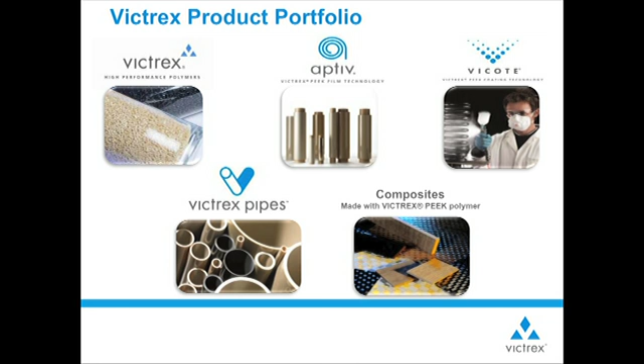For example, VICTREX maintains and builds on the most extensive database of technical and application testing for PEEK. To aid in application development, we offer product samples, part prototyping, and mold trial support. Our customer service quotes 7-day delivery for standard products worldwide, and our logistics team plans for 3 months product inventory on hand in warehouses globally.

Now that you have an inside view of Victrex, let's take a look outside to the industries we serve, specifically the industries that have a need for seals that can survive the extremes. I'll start with this overview of trends and challenges facing the oil and gas industry.

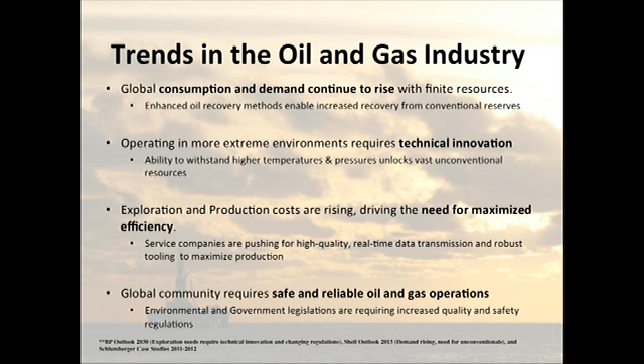Global consumption and demand continue to rise with finite resources. Enhanced oil recovery methods enable increased recovery from conventional reserves. Operating in more extreme environments requires technical innovation. The ability to withstand higher temperatures and pressures unlocks vast unconventional resources. Exploration and production costs are rising, driving the need for maximized efficiency. Service companies are pushing for high-quality, real-time data transmission and robust tooling to maximize production. The global community requires safe and reliable oil and gas operations.

Environmental and government legislations are requiring increased quality and safety regulations. The oil and gas industry trends can be boiled down to four main challenges shown here: escalating demands, operational efficiency, reliability and predictability, and enabling innovation.

Addressing these industry changes is our goal, so Victrex aims to support extended exploration to find the oil, and then boost and optimize production to get all the oil out of the ground quickly and safely. Now let's take a look at how this relates to sealing for the extremes.

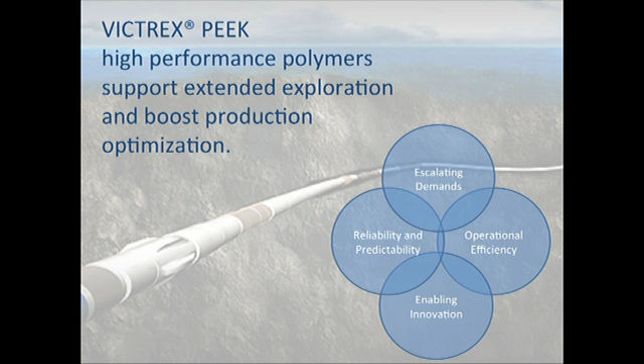This slide provides an overview of the downhole tools used for oil and gas exploration and production, from seismic sensing and logging to drilling, then completion of the well to commence production. When production slows, stimulation tools can help enhance recovery by drawing more oil and gas out of the reservoir. Hydraulic fracturing, or fracking, is an example of well stimulation that has greatly enhanced recovery of natural gas.

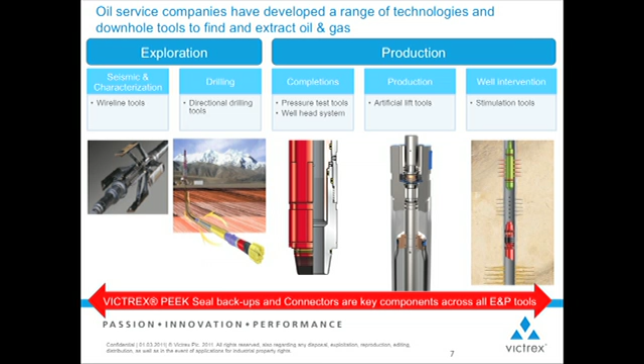The key point here is that seal backups and connectors, which have a sealing function, are key components across many types of exploration and production tools. VICTREX PEEK has been specified in these applications for many years, and more extreme environments are driving new specifications into each new generation of downhole tools.

Here we see a simple chart to show the typical HPHT operating environment for an oil and gas well. The arrows are meant to convey two things. First, the typical well environments are getting hotter, with higher pressures, so the HPHT range is expanding to what some call extreme or ultra HPHT. New temperature and pressure targets are being defined and are driving new polymer development.

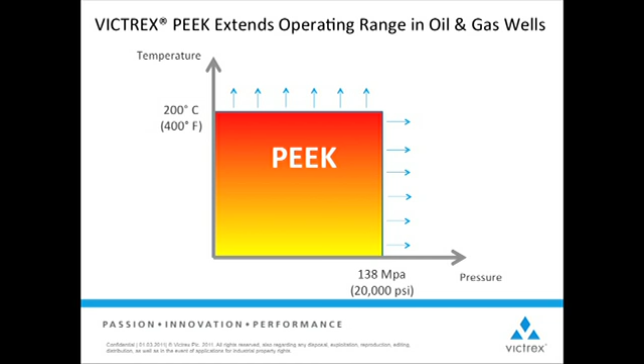Second, PEEK is known to perform well with continuous operation in this range, but can also handle limited durations at higher temperatures or pressures. So the trends and challenges for oil and gas clearly show a growing demand for extreme sealing solutions. However, I would like to take a moment to show the value that has already been delivered with VICTREX PEEK. Proven performance in the most extreme oil field environments.

PEEK's operating temperature range of -60 to 260 C with a pressure rating of up to 30,000 psi, and it withstands a wide variety of oil and gas fluids and sour gas exposure. Provides 100% greater pressure handling capability than PTFE and 300 times more creep resistance. PEEK has 12 times the compressive strength versus PTFE at elevated temperatures and pressures.

Its compressive creep is 3 to 4 times less than PPS at 80 degrees C, more than twice the performance life. In multi-material sealing assemblies, VICTREX PEEK backup rings bridge extrusion gaps, and in connectors, VICTREX PEEK reduces the heat aging effect and extends the usable life. No electrical leakage. In connectors, VICTREX PEEK accommodates thermal expansion of metal elements, and the molding of integrated assemblies eliminates cracking and leaking to ground.

We have some examples of extreme sealing in industrial environments, but I will cover these later when we focus on application success stories. Let's move now to the technical portion of this webinar, where we cover sealing engineering requirements and VICTREX PEEK material considerations in more detail.

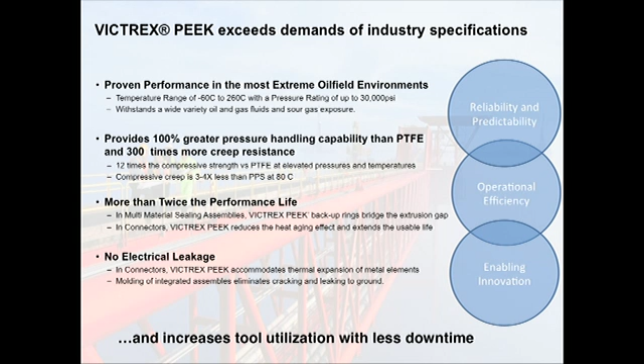In this section, we'll talk about extreme sealing solutions, including key engineering requirements, material property considerations with PAEK polymers, and VICTREX PEEK long-term performance. Many of the key engineering requirements for backup seals are supported by the semi-crystalline nature of PEEK, which allow it to operate in extreme temperatures, chemicals, and pressures. This allows for reduced downtime and longer time between maintenance cycles, as well as increased productivity.

The chemical resistance of PEEK gives it resistance to all common solvents, high and low pHs, steam, hydrolysis, and so on.

This allows the use and inventory of fewer part numbers, and allows the same part to be used in a broad range of environments. The wear and abrasion resistance of PEEK allow it to be used in replaceable components for abrasion resistance. It extends the maintenance cycles and equipment life, and also allows long-term performance in abrasive oil field slurries.

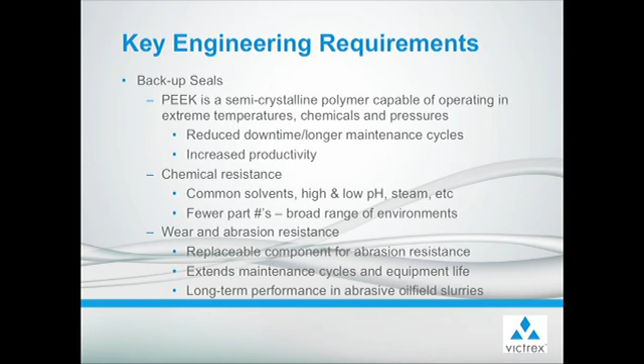Backup seals also need to operate in a broad range of operating temperatures and conditions, from low to high temperatures, requiring creep resistance or no cold flow, high tensile strength to bridge extrusion gaps, and high compressive strength to support high pressure differentials. Downhole oil field service at 500 Fahrenheit is typical for high pressure and high temperature operation, and the material still needs to be strong and stiff to bridge extrusion gaps.

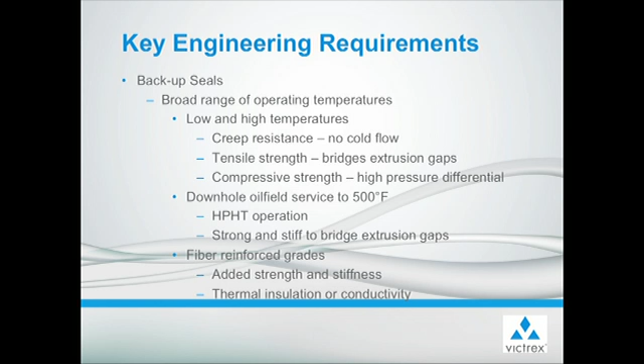The use of fiber reinforced grades can add to the strength and stiffness of the material, as well as adding either thermal insulation or thermal conductivity if those are required.

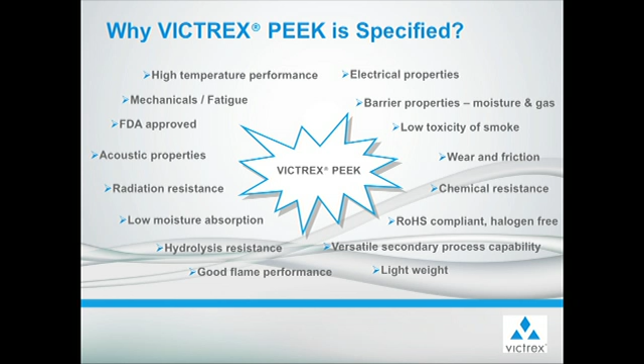VICTREX PEEK might be best known as a high temperature material, but its combination of properties are what allow it to be specified in a wide variety of applications. Whether it's mechanical properties like creep, fatigue, strength, or modulus, its moisture resistance or hydrolysis resistance, its wear and friction properties or chemical resistance, it typically takes at least 2 of the properties listed on this page, but preferably 3, before any other material is eliminated. If there is only 1 or 2 of these properties required, there are typically other solutions existing.

The VICTREX portfolio is mainly composed of our PEEK polymer. However, we do have HT and ST polymers, a wide variety of compounds including glass and carbon fiber reinforced grades, tribology grades for wear and friction applications, HMF grades, which are carbon fiber reinforced products with superior mechanical properties, higher than our standard chopped carbon fiber products, as well as our WG grades, which are proprietary PTFE-free blends for high temperature wear resistance.

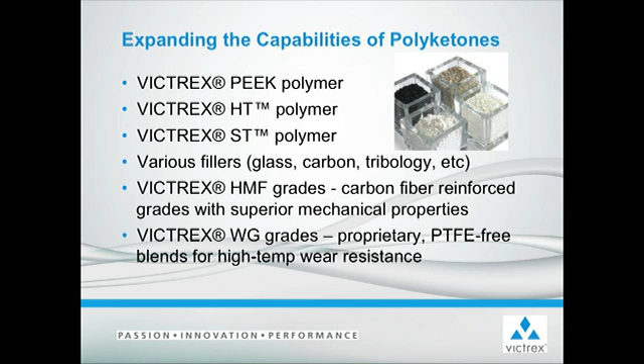PEEK, or polyaryl ether-ether ketone, is available in 6 different viscosity grades, ranging from our ultra high flow 90 series to our general purpose 450 range, as well as the extra tough 650 range. These are all available in granule or pellet form, powder or fine powder, have a glass transition temperature of 143 C and a melt temperature of 343 C, an HDT of 152 C when unfilled, and up to 349 C when filled.

Our HT polymer, or polyaryl ether ketone, or PEK, is available in 2 different viscosity grades, granules or pellets, powder and fine powder forms, has a glass transition temperature of 154 C and a melt temperature of 374 C, an HDT of 165 when unfilled, and up to 368 C when filled with reinforcing materials.

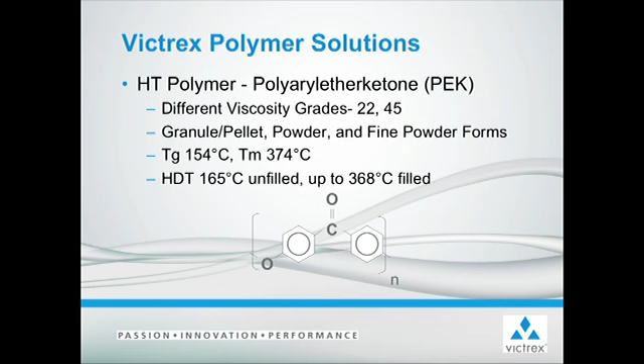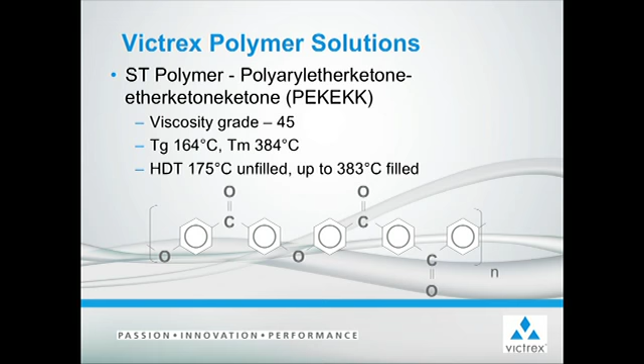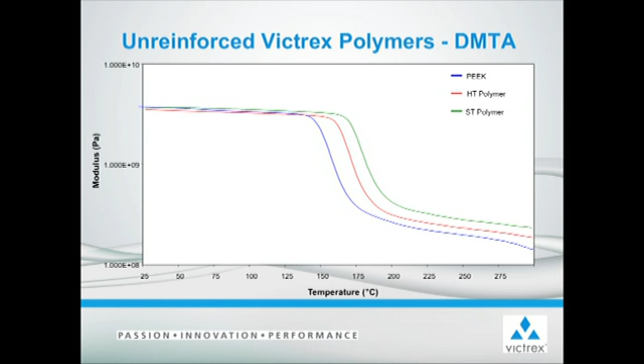If you take a horizontal line starting at a specific modulus and go across the temperature range, you can see how the materials differ and how much additional strength and stiffness is retained when you get above the glass transition temperature for the different materials we have.

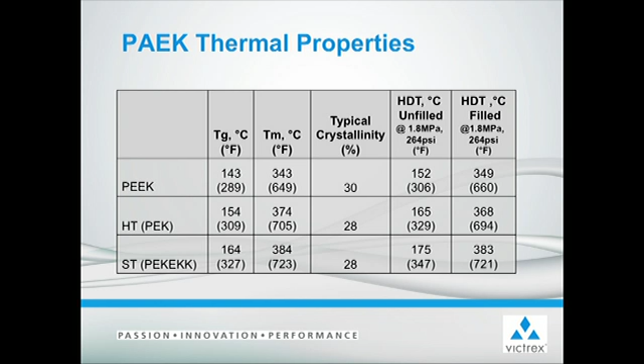This table is just a recap of the thermal properties of each of the different grades, including glass transition, melt temperature, HDT, filled and unfilled for each of the different base resins. It also shows that each of these have a similar level of crystallinity, and beyond what's on the table, mechanical properties, for example tensile strength and modulus, are all very similar, as well as the chemical resistance of each of these grades.

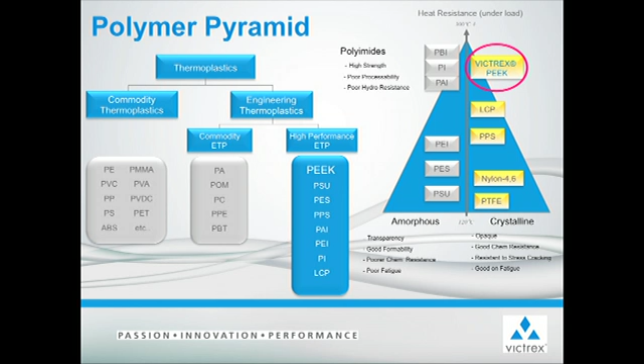The semi-crystalline materials, like PEEK, are best known for mechanical properties including creep and fatigue, excellent chemical resistance and stress cracking, wear resistance, and excellent flow during injection molding or extrusion, but can be subject to anisotropy and high shrink.

On the next few slides, we'll go through some background information on the differences between amorphous and semi-crystalline materials.

Those crystalline regions act as reinforcing structures within the amorphous matrix and give the polymer some additional properties beyond what you'd see with amorphous materials, including mechanical properties like creep and fatigue, and chemical resistance.

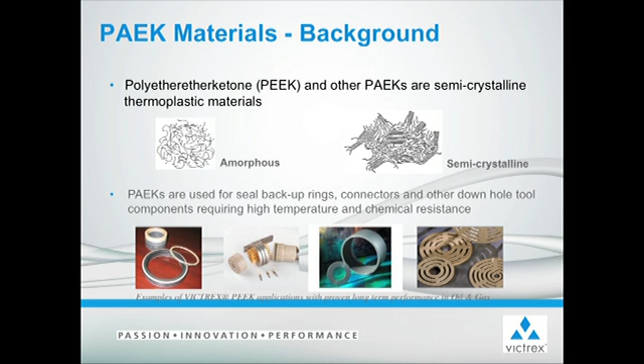Again, semi-crystalline polymers are composed of an amorphous matrix with crystalline structures that act as reinforcements within the matrix. For unfilled polymers, the mechanical properties above the glass transition temperature are controlled by the crystalline phase. For amorphous materials, there's no crystalline phase, so there's very little in terms of mechanical properties above the glass transition.

The crystalline regions within a semi-crystalline polymer act to enhance their mechanical properties, just like you see with the addition of reinforcing fillers like glass or carbon fibers that help to increase strength and stiffness.

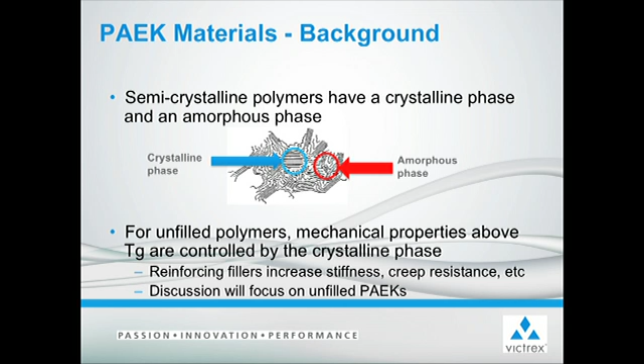If we take VICTREX PEEK 450G as an example, it contains 30 to 35% crystalline material within its structure, which is higher than most other PEEKs available on the market.

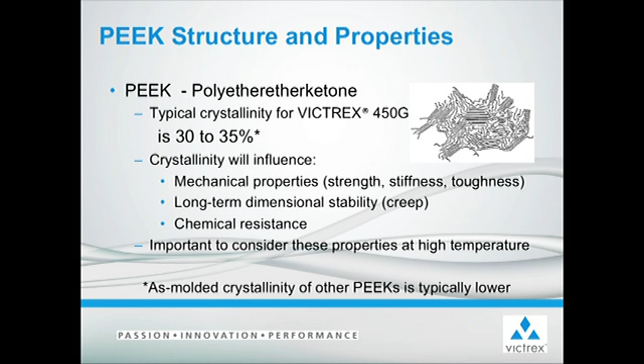This crystallinity influences properties like mechanical properties, including strength, stiffness, and toughness, long-term dimensional stability, like creep, and chemical resistance. It's also important to remember that crystallinity influences properties at elevated temperatures, even more so than at room temperature.

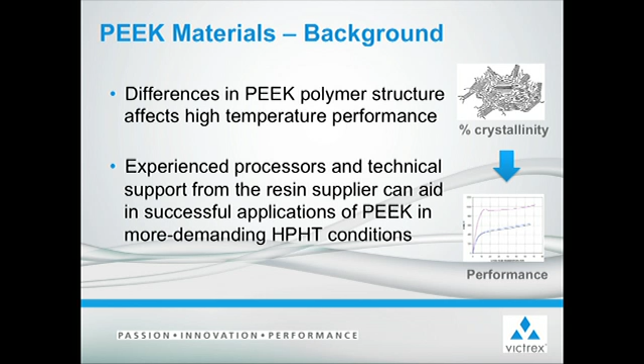Differences in the PEEK polymer structure, specifically the crystallinity, will affect the high temperature performance. Experienced processors and technical support from the resin supplier can help aid in successful applications of PEEK in more demanding HPHT conditions. The different versions of PEEK available on the market will exhibit different mechanical properties.

For example, our VICTREX PEEK 450G, our unfilled general purpose grade, is strong and stiff. It has high tensile modulus, a high tensile yield strength, as well as a high elongation.

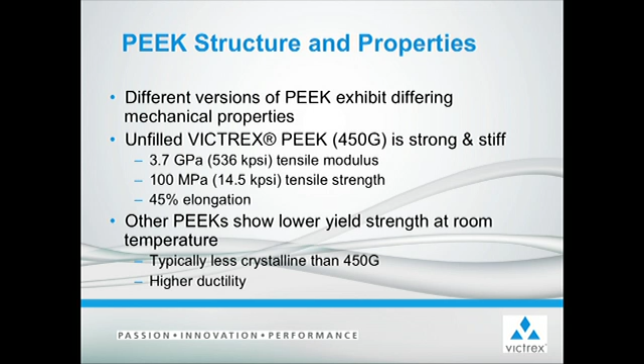Other PEEKs show lower yield strength at room temperature due to their lower crystallinity than 450G. However, this does relate to a higher ductility.

The difference in PEEK materials can be referred to as a stiffness-toughness balance. In order to get stiffness, you have to compromise toughness, and vice versa. To increase toughness, you have to compromise stiffness. This is due to differences in the polymer structure that affect factors such as the crystallization rate and overall crystallinity.

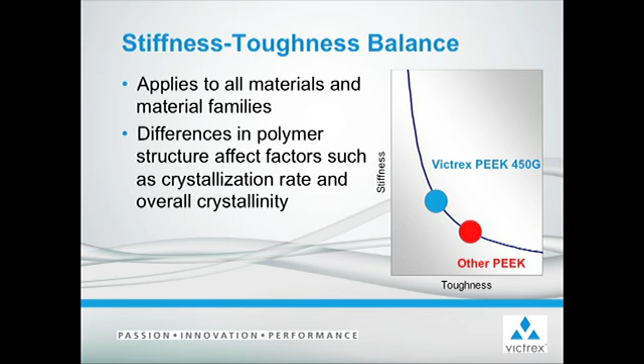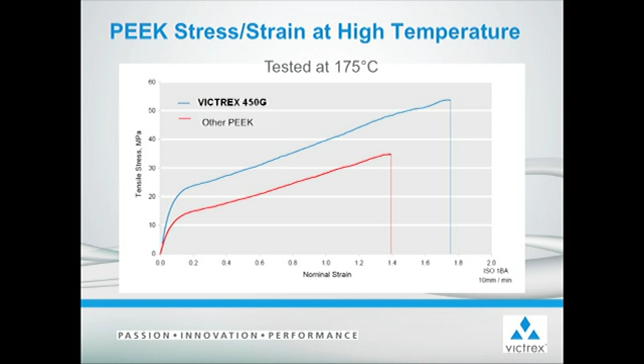Annealing, or heat treating a semi-crystalline polymer above its glass transition temperature, can increase the amount of crystallinity present. This results in less residual stress, higher mechanical properties, and better dimensional control.

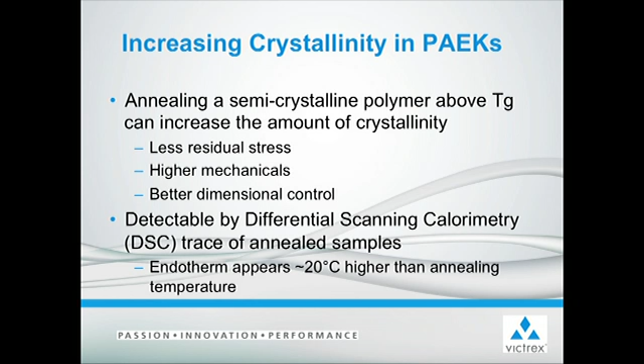You can see this on a DSC trace of the annealed sample as an endotherm roughly 20 degrees C higher than the annealing temperature. A typical annealing cycle for PAEK materials contains a hold at 200 degrees C for approximately 4 hours.

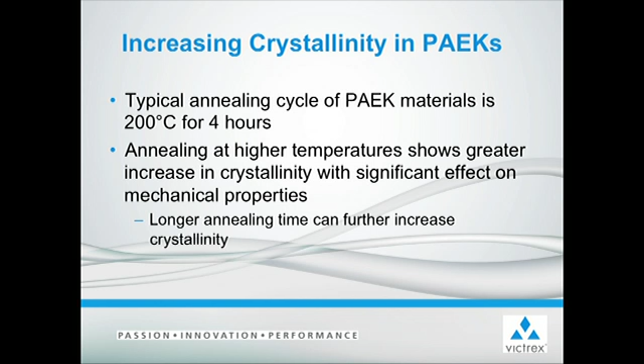Annealing at higher temperatures will show a greater increase in crystallinity with a significant effect on the mechanical properties. Longer annealing times will further increase the level of crystallinity.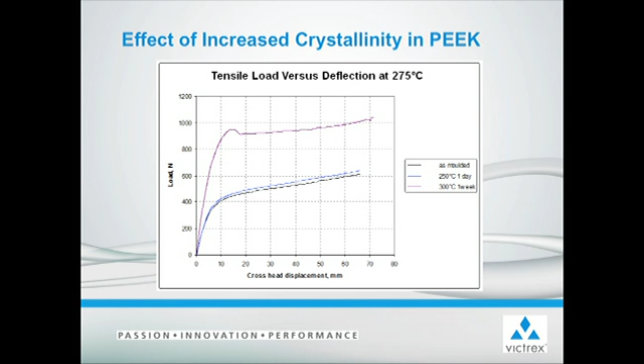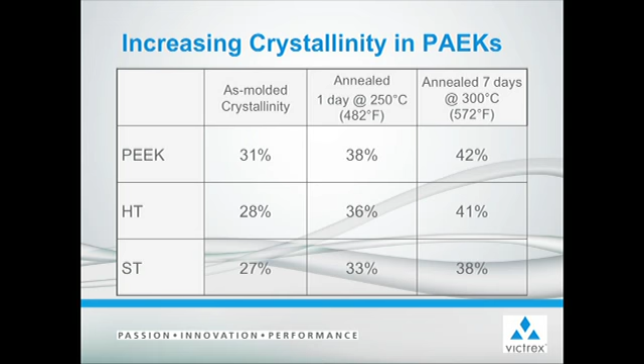Without looking too closely at the specific numbers on this table, you can see that crystallinity increases in PEEK, HT, and ST as you go from an as-molded condition to annealed for 1 day at 250 C to annealed for 7 days at 300 C.

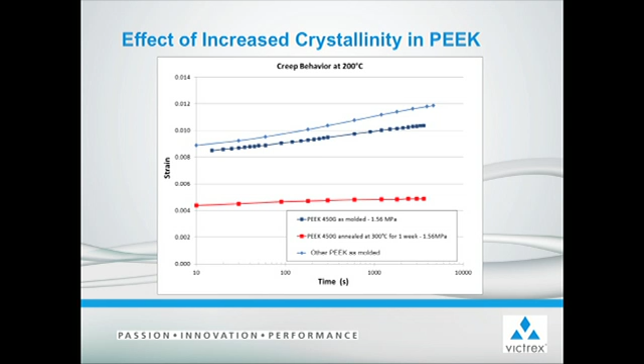More importantly, you can see that the additional crystallinity present in PEEK 450G gives it less creep than other PEEKs at 200 C. However, with high temperature annealing, 450G's creep resistance is vastly improved and between 1/2 and 1/3 that of unannealed PEEK. The illustrations on this slide show how crystallinity and creep relate to backup seals.

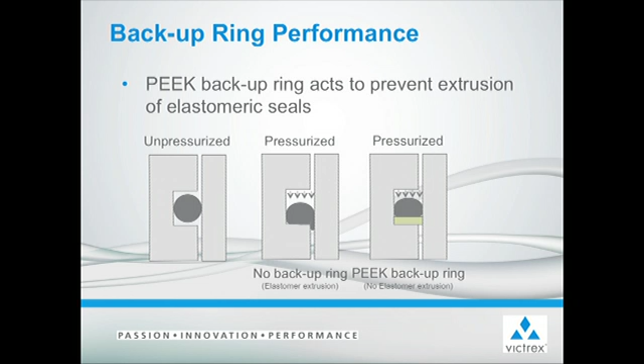PEEK backup rings support high differential pressures and elevated temperatures to prevent the failure of elastomeric seals by extrusion.

In summary, crystallinity is critical. High levels of crystallinity result in increased strength and stiffness at elevated temperatures, a significant improvement in creep resistance, as well as improved chemical resistance and higher compressive strength and modulus.

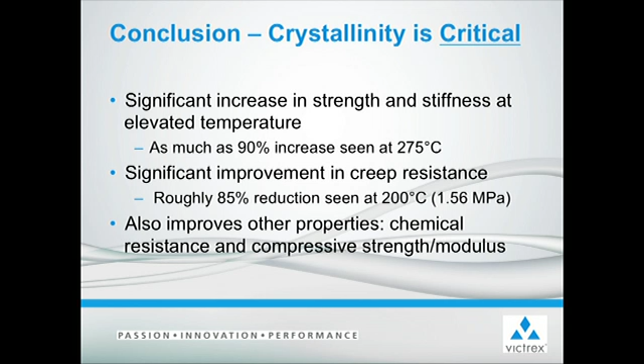Finally, I'd like to go through some application success stories, as well as talk about our VICTREX technical support capabilities. We have a number of successful applications in seals, backup rings, and packings.

Effective sealing is a critical requirement throughout the oil production process. Some of the benefits of PEEK are design freedom with process versatility and ease of machining.

Some of the key engineering requirements for these seals are differential pressure resistance from 20 to 50,000 psi, temperature resistance to 250 C and greater, high shear and compressive strength, creep and extrusion resistance, excellent chemical resistance, and ductility for assembly. And these are typically replacing or backing up and reinforcing elastomers and fluoropolymers.

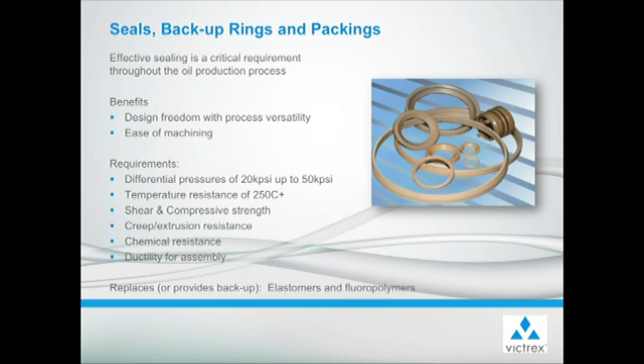Downhole electrical connectors also perform in a sealing capacity. They're utilized for both the transmission of power and data between the operating environment and the surface. The benefits of PEEK include its ease of assembly.

There's no impact from differential thermal expansion, and this is typically resulting in a loss of electrical insulation in traditional materials, usually caused by the thermal expansion differences and the gap that occurs between the conductor and insulator. The overmolding of PEEK on the conductors gives a durable seal that prevents the loss of electrical properties.

Some of the key engineering requirements are electrical insulation, differential pressures of 20 to 50,000 psi, temperature resistance to 250 degrees C and greater, chemical resistance to downhole corrosive chemicals, moisture and hydrolysis resistance, and these are typically replacing glass-sealed ceramic, epoxy, or metal composite connectors.

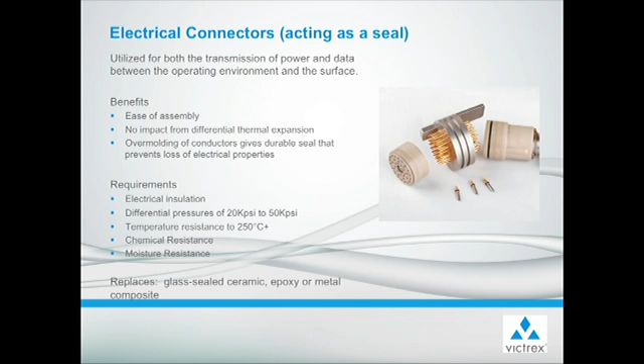Another common application for PEEK is in valve seats. Seats are used in many types of valves for downhole tools, wellhead equipment, and refining processes. This specific example shows a ball valve.

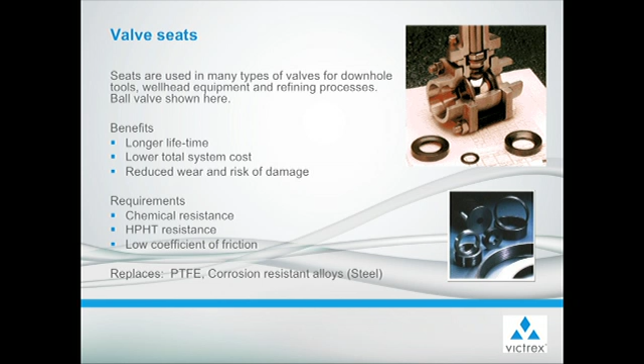Some of the benefits of PEEK are its longer lifetime, its contribution to a lower total system cost, and its reduced wear and risk of damage. Some of the key engineering requirements are chemical resistance to a wide range of chemicals and environments, HPHT resistance, and a low coefficient of friction. PEEK seats are typically replacing either PTFE or corrosion-resistant alloys.

Another application are composite wear rings made with VICTREX PEEK Polymer. These are high wear, high maintenance rings that are in pumps, traditionally made from bronze, stainless steel, and cast iron. The benefits of PEEK are its low friction and wear, the ability to have lower and reduced running clearances, its superior strength and stiffness.

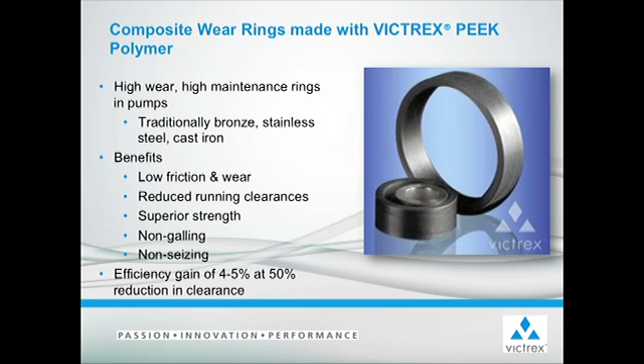It's a non-galling and non-seizing material, and offers an efficiency gain of 4 to 5% at a 50% reduction in clearance. This application is for a valve seat for a natural gas pressure regulator in a valve that's used in natural gas fueled vehicles.

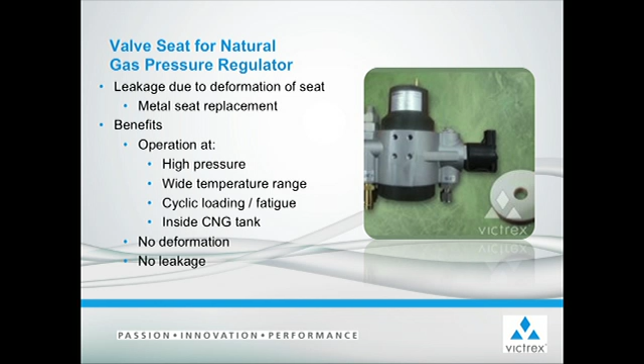This is replacing a metal valve seat that leaked due to deformation of the seat. Some of the benefits of PEEK are its operation at high pressures across a wide temperature range, its ability to withstand cyclic loading and fatigue, and its operation inside a compressed natural gas tank. There was no deformation of the PEEK and no leakage after its replacement of the metal seat.

This application uses our APTIV PEEK film as a diaphragm liner for a back pressure regulator. The problem with the PTFE material was migration of the existing liner, blocking the flow to the port, and that was due to the poor creep resistance of the PTFE.

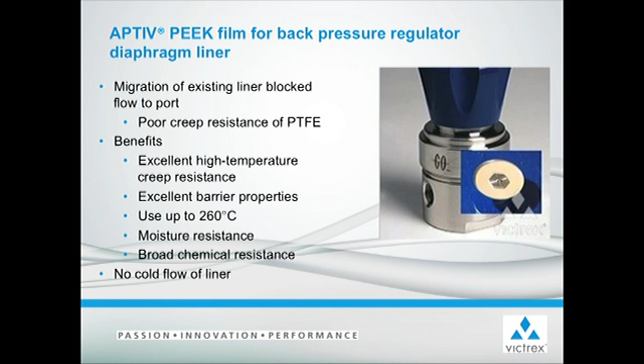The APTIV PEEK film is acting as a backup seal for the PTFE diaphragm and provides excellent high temperature creep resistance, excellent barrier properties, the ability to use it up to 260 C, excellent moisture resistance, and broad chemical resistance. It also allows no cold flow of the liner in acting as a backup.

VICTREX is dedicated to PAEK materials and technology. Our technical service and support for customers and OEMs is industry focused. We can help you identify the correct grade for your application using our 35 years of experience with PEEK, but also with tools like FEA.

We provide part and tool design assistance, including mold filling analyses. We provide direct manufacturing support, including molding trials and advice on annealing and finishing operations. We also have regional innovation and technology centers that provide application development support. If you ever have any questions about VICTREX PEEK, call us anytime.

In summary, VICTREX has more than 30 years experience in sealing applications. We have a passion for customer support with convenient global logistics for fast shipments of raw material and samples. We have innovative solution experts with technical support available in 30 countries, supplemented by our own testing facilities, and proven performance in mechanical sealing and electrical integrity underpin 30 years of success in the industry. Thank you for your time.